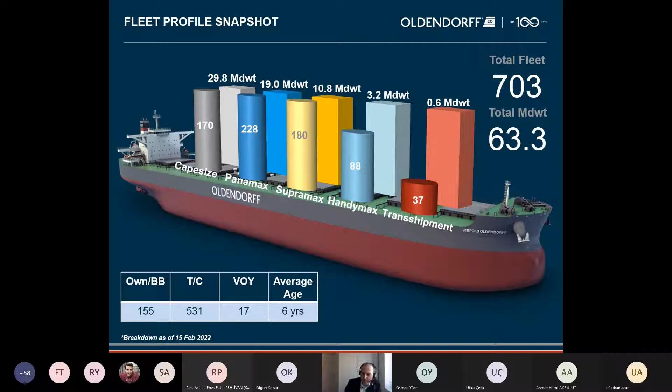The vessels in our own fleet achieve their energy efficiency credentials primarily through very energy efficient engines. Our larger vessels, Newcastle Maxes at 206,000 to 208,000 deadweight, are primarily fitted with the latest Mark 9 G-type engines from MAN. These are ultra long stroke, which results in lower engine speed and a lower RPM, which in turn allows the use of a larger, more efficient propeller. The larger propeller is significantly more efficient in terms of propulsion, reducing fuel consumption and resulting in reduced carbon dioxide emissions. The vessels are also equipped with auxiliary engine economizers designed to recapture waste heat from the auxiliary engines.

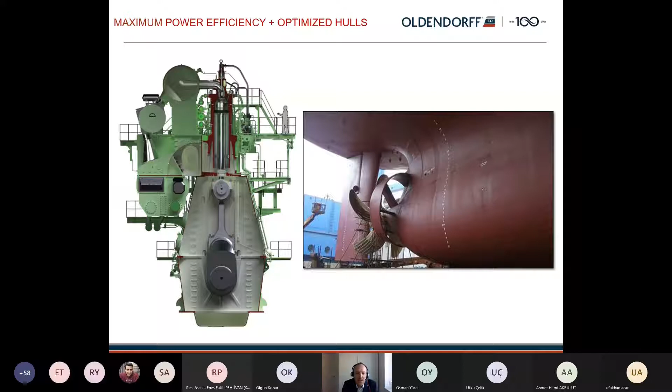These vessels are also equipped with Becker Mewis ducts and rudder bulbs, power-saving devices which provide fuel savings and reduction of greenhouse gas emissions. The Mewis duct itself enhances the flow of water to the propeller to increase thrust, and the rudder bulb is an additional power-saving device which changes the hub vortex to streamline the flow behind the propeller. These two eco features combined produce fuel savings of between 5 to 8%. This is significantly influenced by the condition of the hull, so a lot of hull fouling can impact the effectiveness of these two eco features quite significantly.

To give you an illustration of the types of vessels that we operate, the smallest vessels in our fleet are handy-size, open-hatch box ships. These are actually classified as general cargo ships, not bulk carriers, the ones on the screen here.

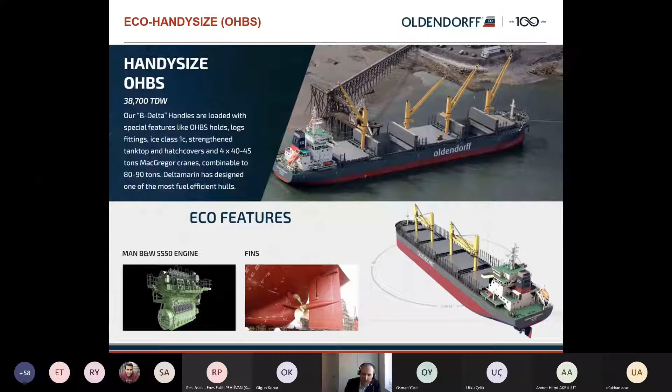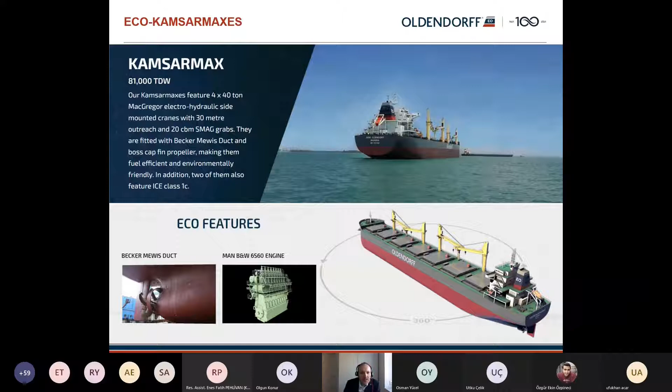We also have Ultramaxes, then Kamsarmaxes, and baby capes, which is a segment that we are particularly strong in. I believe we have the largest baby cape fleet in the world. This allows vessels with relatively shallow draft but a large cargo intake to enter shallow ports. These vessels are somewhere between a post-Panamax and a Newcastle-Max in their design.

And then the largest vessels in our fleet are the Newcastle Maxes. We worked very closely with Hyundai and MARIC to develop the most economical Newcastle Max forms. Again, these are using the G-type engine from MAN and are fitted with Mewis ducts.

Just going back to the baby capes, what's interesting to note is that we have a mixture of fixed and floating price index period charters, owned vessels, and trip chartered vessels. Oldendorff has recently invested in the baby cape segment with a purchase of 15 modern vessels to strengthen the baby cape fleet.

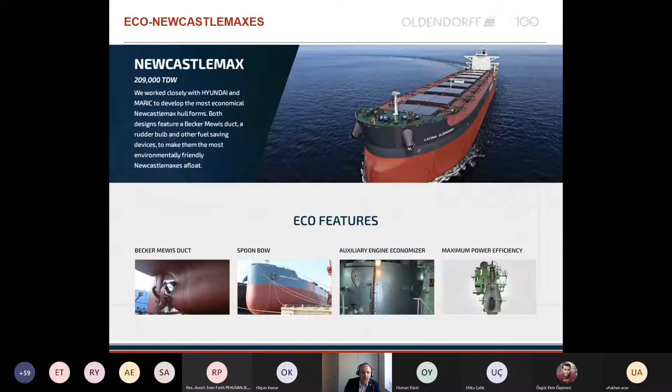We transport wind turbines to support the energy transition. Those are transported on our smaller vessels, so handies and ultras, transporting the wind turbines around the world, and also some forestry products.

Our transshipment division that we launched in 2002 - already it's 20 years old. Our logistics solution results in substantial freight savings for our clients. Our transshipment of cargoes from or onto larger vessels provides lower freight rate per ton on long-haul trades. We can arrange both ocean transportation as well as transshipment in a safe, cost-effective, and environmentally friendly manner, and we assume full responsibility for the entire package. Our clients can rest assured that their cargo can get from A to B efficiently and reliably.

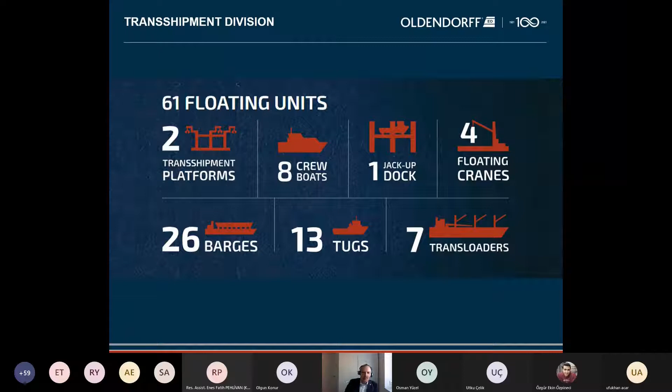Just going back to this slide a little bit about our clients. Our cargo clients include raw material producers, agricultural traders, importers, exporters, steel mills, power companies, and also other industrial end users.

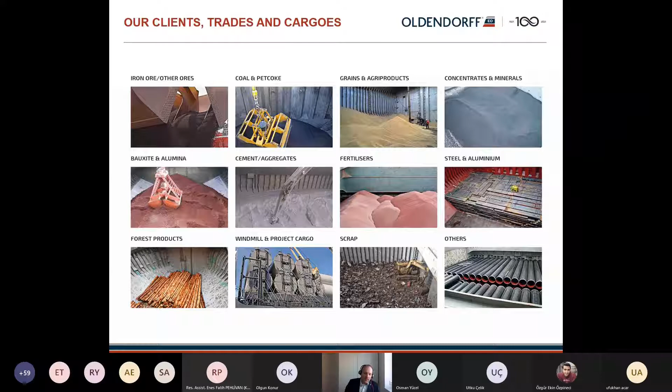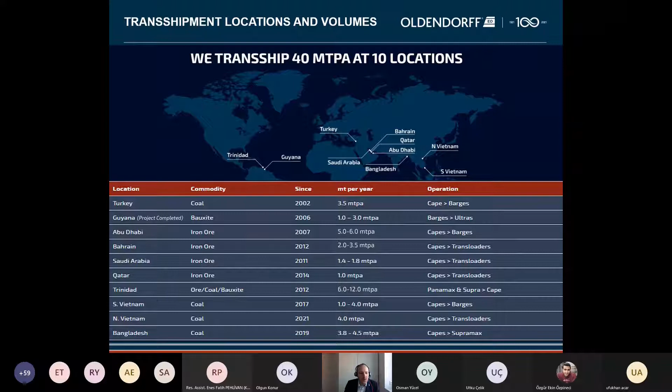Currently, this is where we operate our transshipment. In the Bay of Iskenderun, we are importing coal for a thermal power station. That's been going since 2002, and we typically import 3.5 million tons per year. This cargo comes in on Capesizes or Newcastle Max vessels and is transloaded or transshipped into barges, which can then go into the draft-restricted port. Our other transshipment operations around the world handle iron ore, bauxite, and coal.

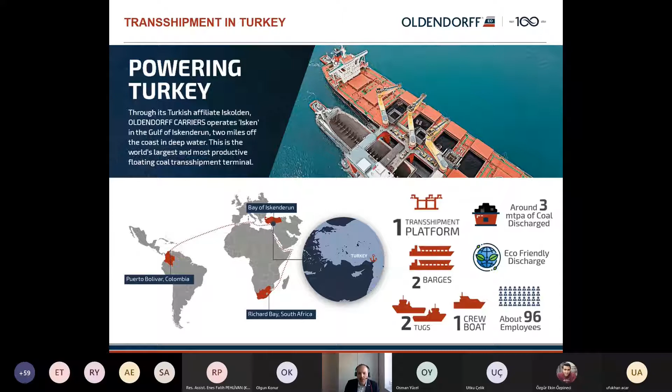We have a transshipment platform called the Isken. It's typically located 2 miles off the coast in deep water. It is the world's largest and most productive floating coal transshipment terminal. We have 2 barges, 2 tugs, and 1 crew boat, and about 96 employees in this operation. This is how it looks.

The Cape-sized vessels come alongside the Isken, and these 3 Liebherr MPG cranes discharge the Cape and transship it into pusher barges. You can see on the bottom right, these are pushed to shore by our own tugs. The Iskolden is the name of the Turkish affiliate that operates the Isken.

The Isken itself is an innovative platform that can transship up to 50,000 metric tons per day. It was ordered from Poland and started operation in Turkey in November 2002. The barges are also self-unloading, so when they come alongside at the power station, they discharge themselves. The client runs a 1,300 megawatt power station nearby, visible in the distance in the picture at the top.

The coal is transferred at the platform via hoppers and conveyor belts to a central barge loading chute, where the barges are loaded between the transshippers' twin hulls. Tugs then push the barges to a jetty at the power station, where they self-unload directly into a receiving hopper at 2,500 tons per hour in an environmentally friendly manner. This system overcomes the 6-meter draft restriction at the jetty in the most economical way, saving owners and the power station enormous cost and resources that would have been required to build and operate a Cape-sized port.

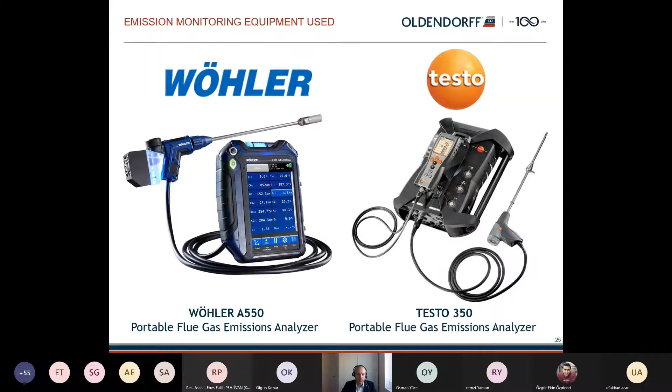For us, it's always important to get feedback from our crew. In this case, from the chief engineer, we asked him to provide unbiased, completely honest post-trial feedback. This was his response to our main questions. Was it easy to handle? He said the biofuel, by its characteristic and behavior, is very similar to gas oil and diesel oil.

The vessel was sailing in tropical waters during the testing period. Therefore, we didn't face any problems with storage and transfer or sludge creation due to low temperatures. The engines and pumps were working well without any troubles.

We then asked whether they experienced any difficulties. He said that soon after commencement of the biofuel use, they cleaned the fuel automatic filters once again. This was considered normal, as remaining HFO residues were washed out from the HFO service tank. Later on, everything was okay.

When asked if he had any general comments, his response was: in order to get a clearer picture of biofuel's effectiveness and its influence on ships' machineries, the test should be repeated over a longer time period and at different temperature zones. Based on gained experience, we believe the ship's crew is ready to do it again.

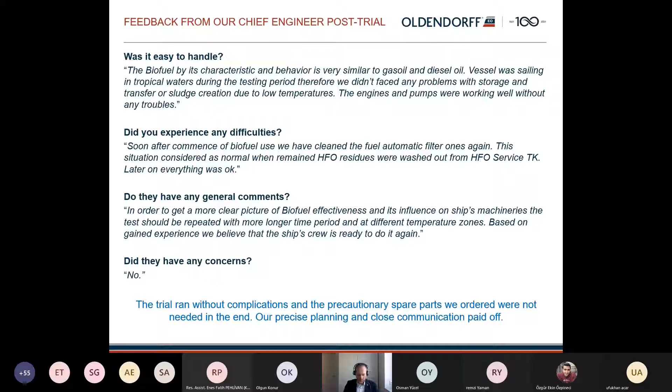To add credibility to the trial, and as our gift to industry and to science, we asked MIT, the Massachusetts Institute of Technology in Cambridge, Massachusetts in the US, to carry out a study. They actually helped us develop the emission sampling protocol. Oldendorff signed a multi-year research agreement with MIT back in November 2019.

In our quest to decarbonize our fleet, we worked with CBA and its campus collaborators, including their grant program, to investigate disruptive improvements in ship design and propulsion, with a view to achieve the IMO's 2030 and 2050 greenhouse gas reduction requirements, as well as the targets set by the EU.

The initial emphasis has been directed at improving hydrodynamic efficiency, which builds on what CBA have been doing with the aerospace and automotive industries. This looks beyond traditional naval architecture, to a deeper integration of form and function. Research areas include morphing structures, hydrodynamic cloaking, moving boundary layers, and alternative energy sources.

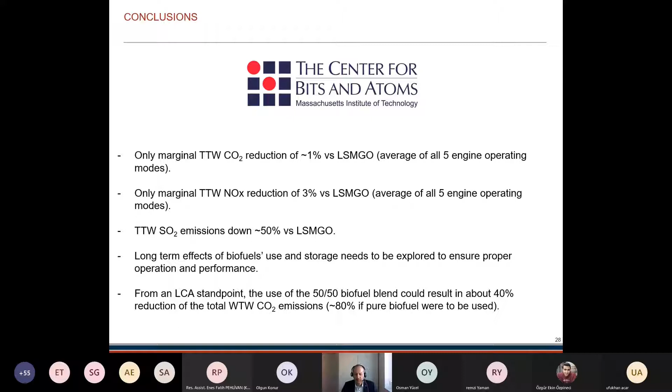The regulatory landscape that the shipping industry is facing is very challenging, and these targets are likely to be strengthened in the years ahead. Currently, our industry needs to achieve a 40% carbon dioxide reduction by 2030, a 70% carbon dioxide reduction by 2050, and an overall reduction in greenhouse gases by 50% by 2050.

These are compared to 2008 levels under the IMO regime. But we have to always remember that we are trading in the EU bloc as well, many of our vessels. So the EU tends to be more stringent and have much more ambitious carbon reduction targets. They have committed not just the shipping industry, but the entire EU bloc to a 55% greenhouse gas reduction by 2030 compared to 1990 levels. This confuses things even more because the EU is using a 1990 base level and the IMO is using a 2008 level.

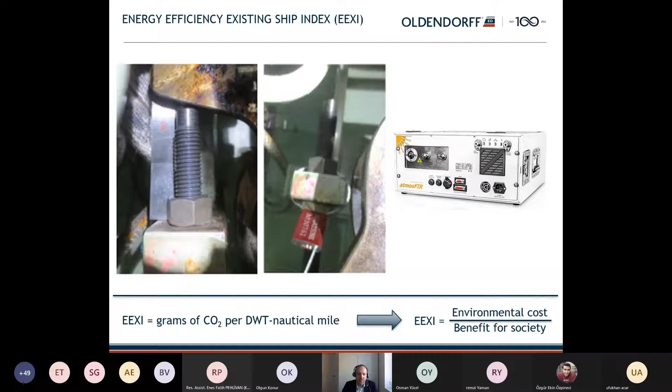The carbon intensity indicators are dynamic operational requirements to improve the energy efficiency of ships. One is required by the IMO under the mandatory requirements. The other is something introduced by the Sea Cargo Charter. We'll focus on the CII that is being implemented by the IMO.

It's a ratio of carbon emitted to transport work, measured on a voyage-by-voyage basis or annually. The carbon intensity indicator is to be established for each ship and should be measured each voyage and for the full year. The IMO requires an annual efficiency ratio based on an energy efficiency rating of A to E. Many of you might be familiar with RightShip's A to G ratings scheme—well, this is similar, but just on an A to E letter grade system.

If a vessel is rated D for 3 consecutive years or rated E for 1 year, it will require a corrective action plan outlining how the required index would be achieved—likely how we will get the vessel back up to a C rating. That will either mean slowing down even more, starting to run on biofuels for part of the voyage, or retrofitting energy saving devices.

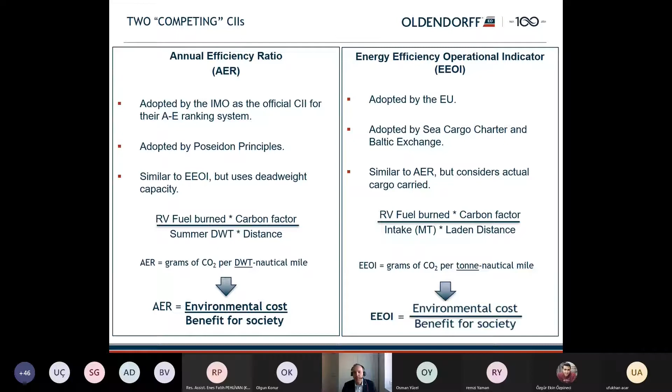So what will this mean to our industry, all these new requirements in respect to sustainability, energy efficiency? We have to ask ourselves, how will this impact the overall ship speeds? How will this impact the global supply of tonnage? How will it impact the existing and future period contracts? How will it impact our current and future contracts of affreightment? How will it impact the tonnage charter parties and cargo charter parties? How will it impact the speed options when fixing cargoes?

And what will the situation be when racing for laycans, particularly in a strong market? Because there's a disincentive to speed up, because you're going to be creating more emissions and negatively impacting your AER. However, ship owners will still want to reach the laycan. So it's going to create some challenging discussions between ship owners and charterers.

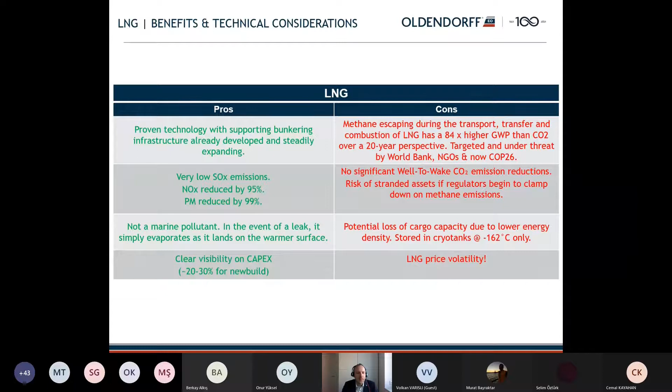It's from LNG, such as, it's a proven technology with supporting bunkering infrastructure that has already been developed and steadily expanding. So for the last 20-25 years, this LNG infrastructure has been built up.

From an emissions point of view, very low SOx emissions. NOx is reduced by about 95%, and there's virtually no particulate matter. It's not a marine pollutant, so in the event of a leak, it simply evaporates. And there's a clear visibility on the capital expenditure.

So you'd pay between 20 and 30% premium for a new build if you went to a shipyard today.

However, our biggest concern is methane escaping during the transport, transfer, and combustion of the LNG. LNG has an 84 times higher global warming potential than carbon dioxide over a 20-year perspective. So for every 1 ton of methane that escapes in the value chain, it's equivalent to emitting 84 tons of carbon dioxide. And the regulators are starting to take note.

In fact, it's already been targeted under threat by the World Bank, NGOs, and even now, during COP26 in Glasgow in November, there was a lot of criticism towards LNG. So it seems like regulators are doing a U-turn, a policy U-turn on LNG. So there is a significant risk of stranded assets if owners order LNG-powered vessels.

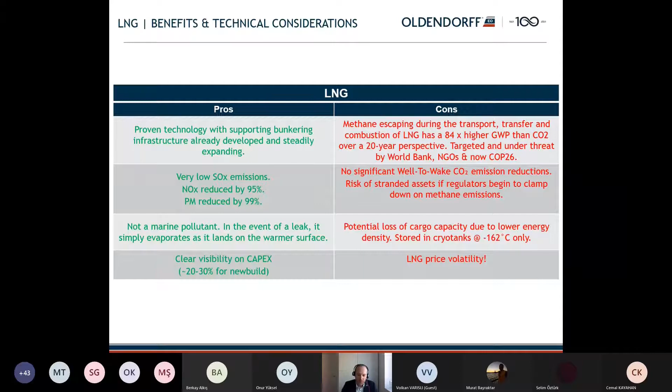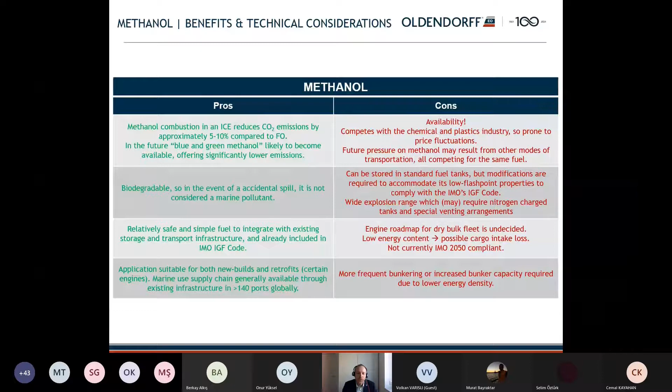It has a wide explosion range. The engine roadmap for the dry bulk fleet is undecided. It's got a low energy content similar to ammonia, so there's possible cargo intake loss, although we've recently seen some designs of a Newcastle Max where there's been no cargo intake loss versus a traditionally built Newcastle Max designed to run on conventional fuels. That's promising, that designers are using void spaces for methanol and ammonia in their designs. If they can't get over that hurdle, then more frequent bunkering or increased bunker capacity will be required due to the lower energy density.

The operational considerations for all these fuels will be safety, fuel availability, bunkering frequency, bunker storage, and pilot fuel. Ammonia and methanol will still require a pilot fuel of about 5 to 10%. Initially it will be low sulfur marine gas oil for that pilot fuel. Later on it might be a second or third generation biofuel, but it's something that needs to be taken into consideration, that there will be a pilot fuel required to create that ignition.

Consecutive voyages versus tramp, the opportunity ships. When you've got vessels dedicated to consecutive voyages on a COA, dedicated trade, it's much easier to justify building a vessel to run on methanol or ammonia. However, vessels employed in the tramp trade need as much flexibility as possible.

From a ship owner's point of view, we have to weigh flexibility versus eco-optimization. Dual fuel issues, when to burn which fuels as prices diverge - we see this currently with LNG dual fuel vessels. We don't have any, but we have been monitoring reports of owners that are running dual fuel engines on their ships. It will depend a lot on the prevailing price of the different fuels.

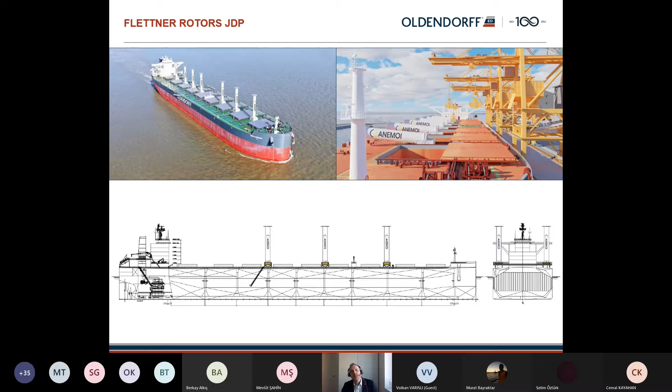And last but not least, we've also investigated air lubrication. In ship resistance, the three main components are frictional resistance, form resistance, and wave resistance. For low speed displacement vessels like bulk carriers and general cargo ships, frictional resistance is the dominant contributor and can reach 85% of the total resistance.

However, we are a little bit skeptical about these systems being fitted on large bulk carriers because of the deep draft. On a Newcastlemax, the vessels when fully laden are submerged 18 meters. So the back pressure, we believe, will completely net out any potential gains from these systems. However, maybe it's a possibility for the smaller vessels, the ultramaxes and handy size vessels, and maybe only if those vessels are sailing in ballast condition.

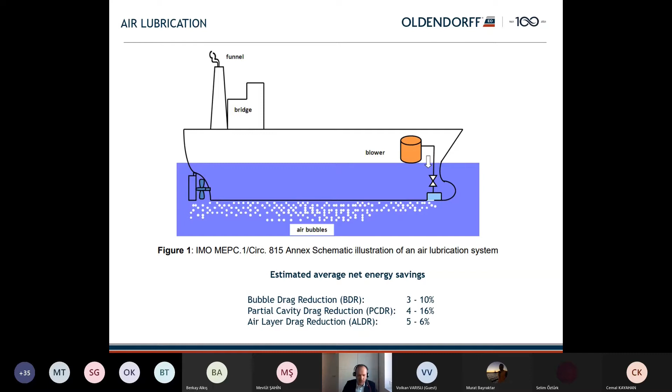One thing else to mention is that the EU are currently looking, in their proposals, to make shore-to-ship power supply, also known as cold ironing, mandatory in all EU ports, and as currently drafted, mandatory for all container ships and cruise ships. However, it could be that they also decide to include bulk carriers and general cargo ships into this proposal.

So looking at this proposal to equip one of our vessels, let's use a Newcastlemax as an example, for shore-to-ship power supply, we're looking at almost $1 million per ship.

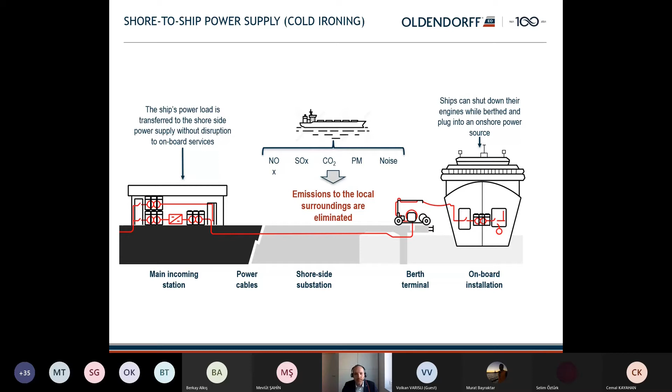That's it from me. Thank you very much for your attention. I hope you could all hear me okay. And if you have any questions, I will try to answer them.

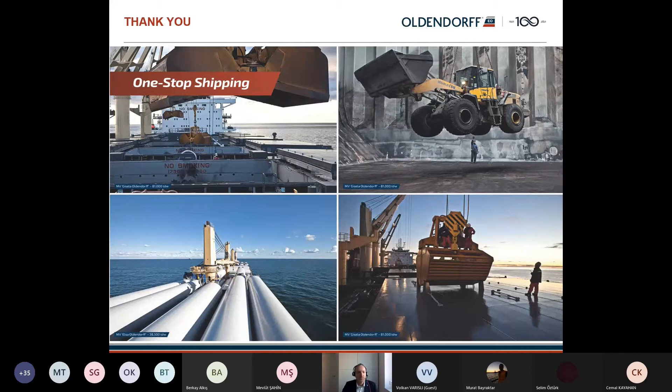Thank you, Mr. Fee. As I can see, there are no questions right now. But if you can, we can wait for a few minutes if our audience have some questions. Sure. So there are no questions, I think. I also think it's a very clear presentation.